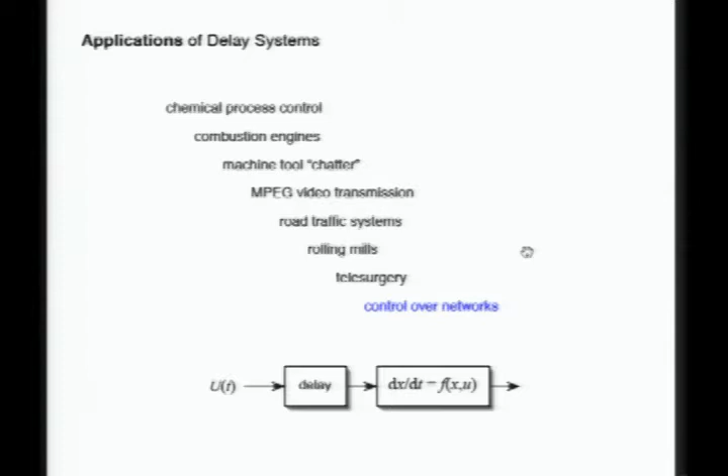Now, a list of engineering applications of delay systems, which is an obligatory part of any such talk, is this particular list that goes into process control, combustion engines, machining, rolling mills, which is an example that Peter Kokotovic contributed to this list, telesurgery, and control over networks that I mentioned.

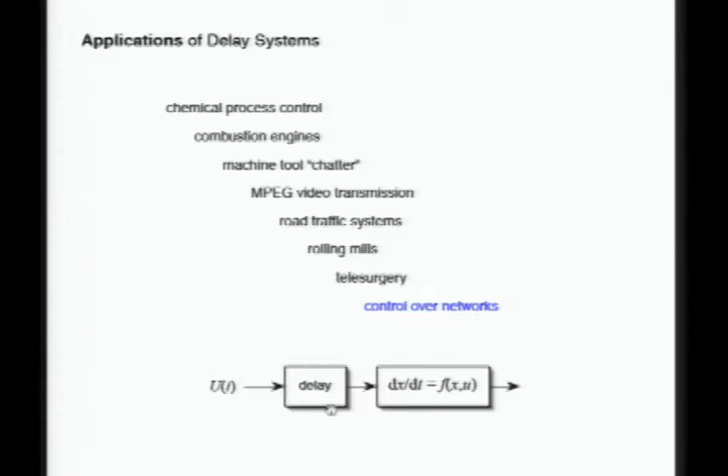My talk will be focused on nonlinear systems with input delays. You can have state delays as well, but the most difficult problem is the one where you have to overcome a delay in the actuator, or where a delay on the sensed variable interferes, which is a similar problem. So I will focus primarily on input delays.

Now, to get to tools for controlling nonlinear systems with long, time-varying, and state-dependent delays, I have to go one step at a time. So I will introduce the ideas that get us to nonlinear control systems with state-dependent delays, basically by going through a progression that I went through over the last few years, namely starting with LTI systems with constant but long, arbitrarily long delays, then extending that to LTI systems with time-varying delays, then going to the nonlinear case with constant delays, and finally wrapping it up with state-dependent delays. The last item will be about 40 to 50% of my talk.

So let me start with LTI systems. Many of you probably know about predictor feedback, but I will remind you and introduce it for others. It's a very neat and elegant tool which, if you haven't seen it, you need to see in the proper way as what it is. So consider this system, x dot equal to Ax plus Bu with a delay on the input. And the idea is that this delay may be very large and the plant may be unstable. How do you compensate that?

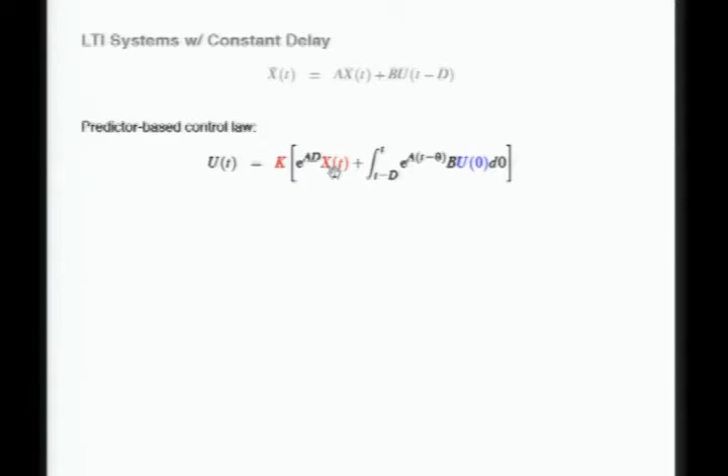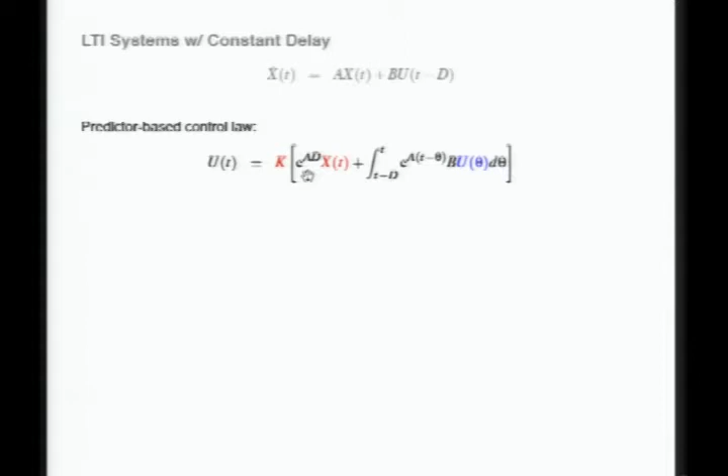If you want some intuition, well, you can look at, for example, the red term. If the plant is unstable, this controller is not going to be just kx, which is not a controller that is aggressive enough for an unstable system. But in the presence of delay, the matrix exponential will increase the gain, and you will get, after the control kicks in, to stabilize that system.

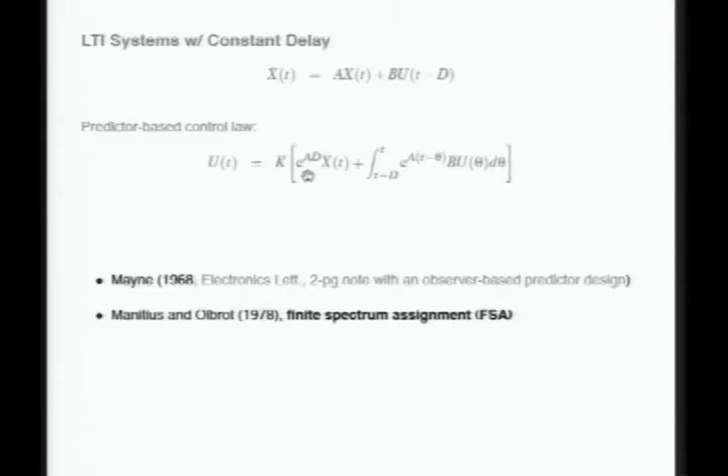Now, where does this idea come from? So there's a history of new, really significant contributions happening in this area every about 10 years. First, Otto Smith introduced the Smith predictor in 1958-59, but this tool is not applicable to unstable systems. It works for systems that are already asymptotically stable and where you just need to compensate a long delay.

Then 10 years later, a result that probably almost nobody knows about except for David Mayne himself, who brought it to my attention. He developed this predictor result 10 years before the people who are credited with it. However, he published it in this Electronics Letters journal. It was a 2-page note, and it even tackles the output feedback case using an observer-based predictor design. Anyway, nobody really knows about that.

This result is generally credited to Manitius and Olbrot in their Transactions paper of 1978, and this approach is referred to as finite spectrum assignment. Why finite spectrum assignment? Because you completely eliminate the effect of the delay after d time units, which means that the spectrum of the system consists of the poles of the ODE that you've placed at arbitrary locations, plus the poles of a transport equation of a pure delay, which is fed with a zero. And those poles are poles at negative infinity. So that's why it's called a finite spectrum assignment. Anyway, for us, I will refer to it as predictor feedback.

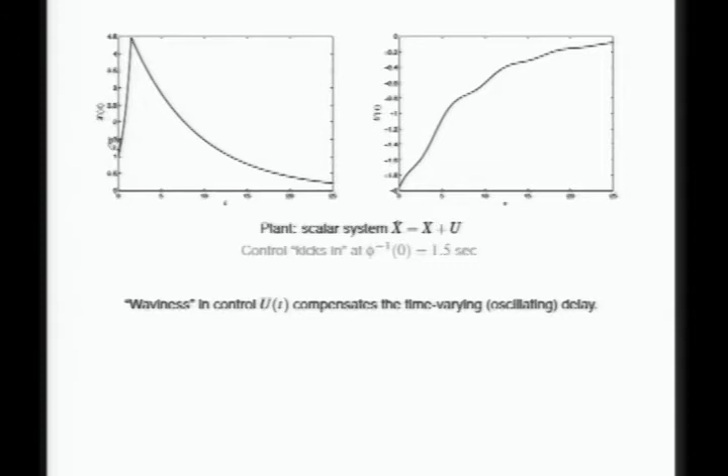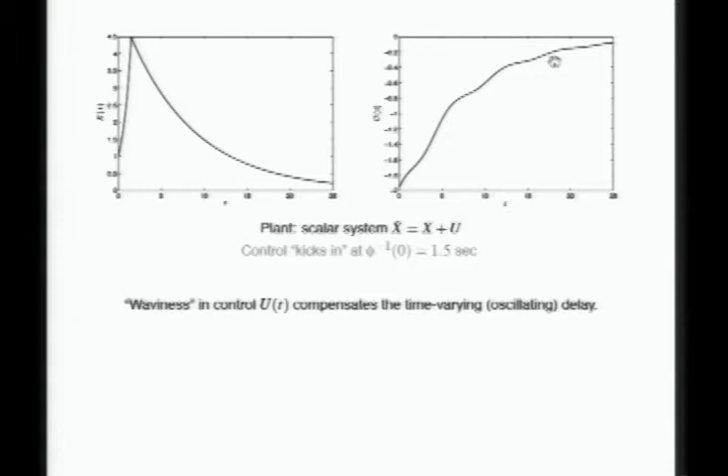Here's an example. The simplest one I can think of, a scalar but unstable system with a time delay that has that sinusoidal pattern. In the response of the state, you don't see any effect of that time, because before the control kicks in, the system runs in open loop. After the control kicks in, the delay is completely neutralized. But in the input, you see how the time-varying delay is being compensated. You see this undulating pattern in the input. This is just an illustrating example.

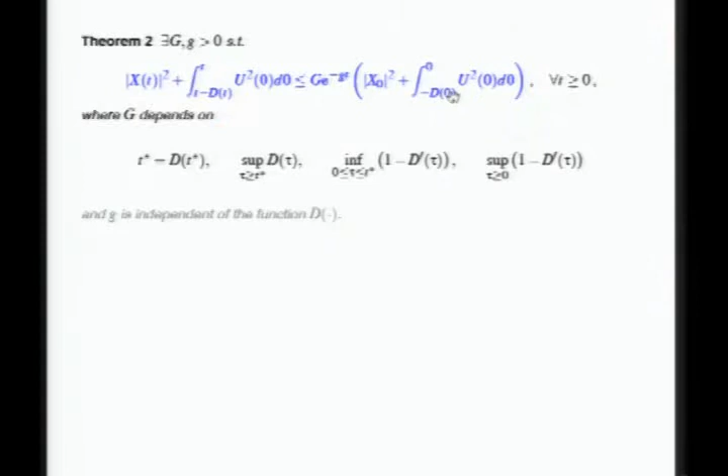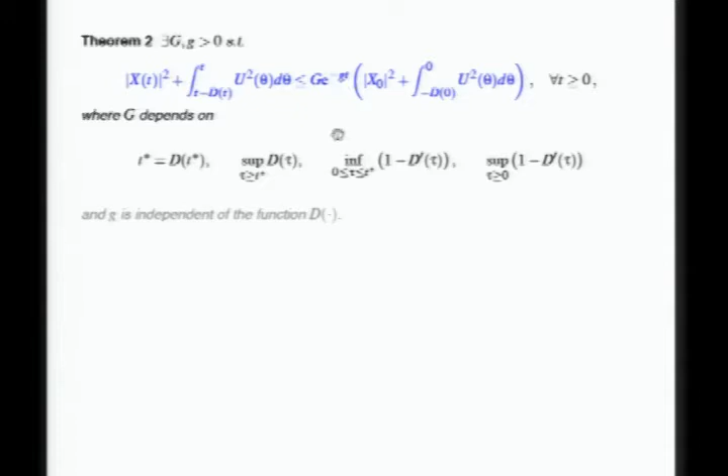What can one prove? One can prove exponential stability in the sense of this L2 norm. So the state consists of a Euclidean norm of the ODE plus an L2 norm of the actuator memory over the time interval equal to the delay. The initial condition is the same norm, but at time t equal to 0. There may be a large overshoot G, which depends actually on the shape of the function d. The lowercase g, the exponential decay rate, is independent of the delay because the delay is actually compensated, so it has no effect on the decay rate.

Now, what are the conditions of a result like this? This is important to see because all the constraints that arise in the time-varying case will also come up in the state-dependent case. There are 4 conditions on the delay, and these are the least restrictive conditions you can get in the setting where you have a time-varying delay. First of all, the delay needs to be non-negative, which means causality. That's an obvious condition. Second, the delay needs to be uniformly bounded, and that simply physically means that all inputs eventually reach the plant.

The fourth condition is that d prime, the delay rate, is bounded from below, which means that the delay cannot just instantaneously disappear. It can disappear only gradually. The key condition, though, the most important of these 4, is that the delay rate is bounded by 1. Why 1? Well, physically, that happens to have the meaning that the input signal never gets reversed. The plant always keeps experiencing newer and newer inputs sent to the plant rather than going back to the older one.

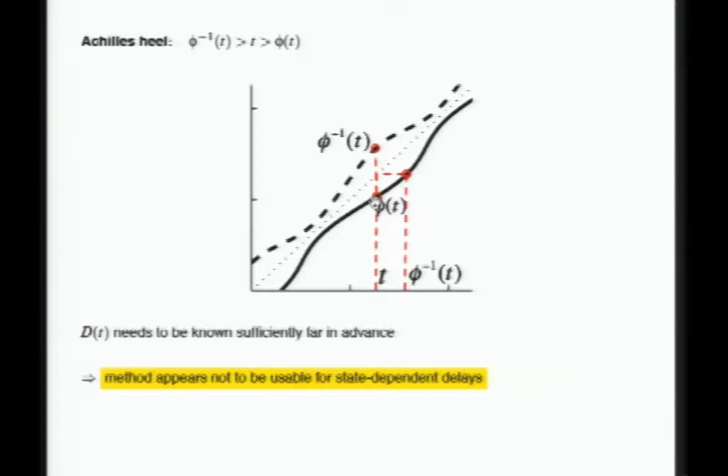The Achilles heel of this whole idea of time-varying delays is the following: the inverse function, phi inverse, which is the inverse of the delay time, happens to be a future value of the function phi. In other words, you need to know the delay a certain length of time in advance in order to be able to invert this function and know the prediction horizon.

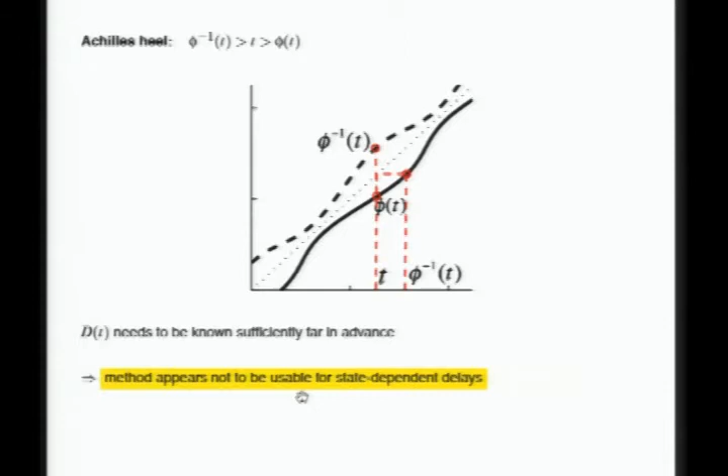So that's a problem. And I thought that there was an insurmountable obstacle for state-dependent delays, because I thought there's no way you could know such a time for a system that is running in real time, and the state depends on the input, which is yet to be computed, and so on and so forth.

Now, let me forget the time-varying delays for a moment and step back to constant delays, but now introduce nonlinear systems. This will be very, very brief, but one big conceptual step comes up. So let me consider systems of the form x dot equal to f of x, u.

I don't know why this dot... It's there. Huh? It is there. You can see it. Okay. Small, but we can see it. That's in Acrobat Reader, but in the preview it shows up nicely.

Anyway, so x dot equal to f of x, u. Completely general nonlinear systems with two reasonable assumptions. Suppose that for the nominal case without the delay, a stabilizing controller is known. Maybe a locally asymptotically or globally asymptotically stabilizing controller. In general, I will assume globally.

And for getting a global result, I also need to assume that the open loop system is forward complete. In other words, it doesn't have a finite escape time. It may be nonlinear, the state may be getting large, but it will not explode before the control gets to kick in. This is a natural assumption. If your system may have a finite escape time and the control is delayed, it's a hopeless scenario. That's all natural, but here's the tricky part.

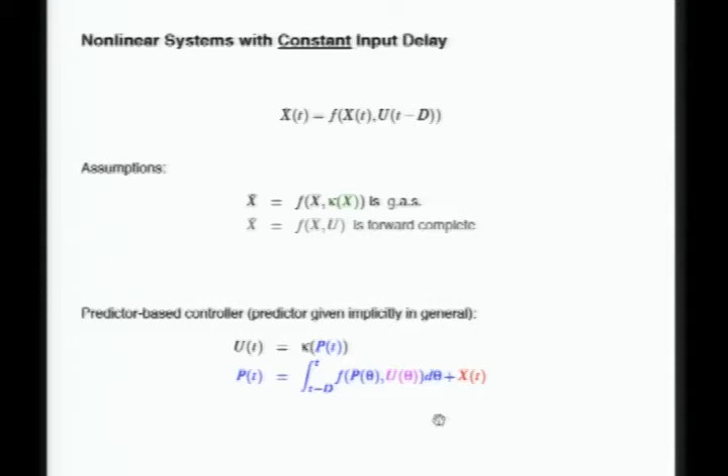Now here, this looks trivial, but actually what's hiding here is different than what it seems. This is not to be viewed as some sort of a filter, as a dynamic component to this feedback law that you calculate. This P is simply a transformation of the current state X. This is not dynamic feedback. It's a purely static feedback where you should think that at each time t, you recompute this variable P using the history of the committed input u and the currently measured state.

The question is how to compute this, and when is it possibly explicitly computable. In general, it is not explicitly computable, but we can prove everything that we need to prove, namely global stabilization under these assumptions for a system in this form.

Now, what is really conceptually the form of this predictor feedback? I will try to make this clear for a particular class of systems where an explicit form for the predictor can be given. This is the class of the so-called strict feed-forward systems. It's a narrower class than strict feedback systems. There aren't too many of those, but they're interesting systems because they're not feedback linearizable, and yet they can be globally stabilized.

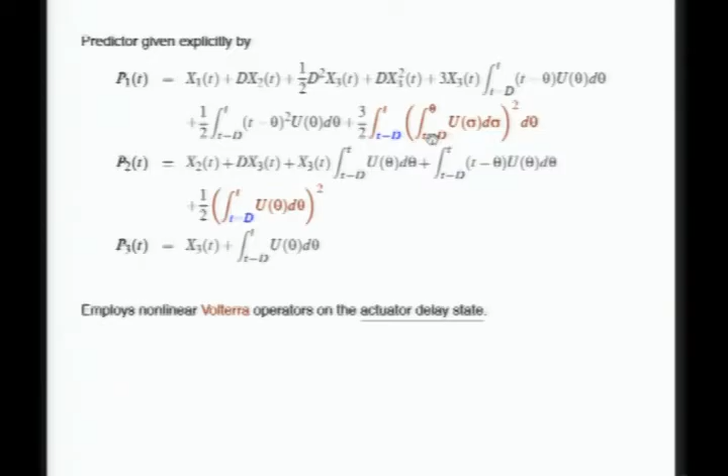So this is truly a full state static feedback, where you have to think of u as a state of the system. This is the actuator state. It's not to be thought of as memory, as a part of a dynamic compensator. So that's typically conceptually what you deal with when you're dealing with nonlinear predictor feedback problems.

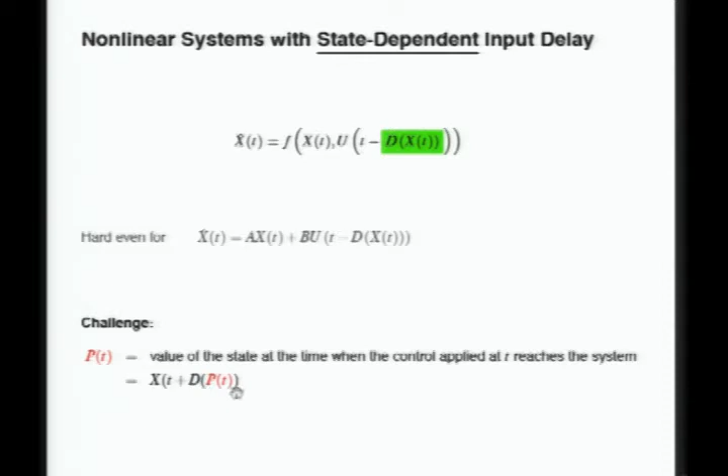The prediction time, the predictor state is the value of the state at the time when the control applied at t reaches the system. But you don't know when this control will reach the system because it depends on the delay time evaluated at that yet to be determined prediction state. It's a chicken and egg problem. It seems impossible to resolve. But it turns out there is a way.

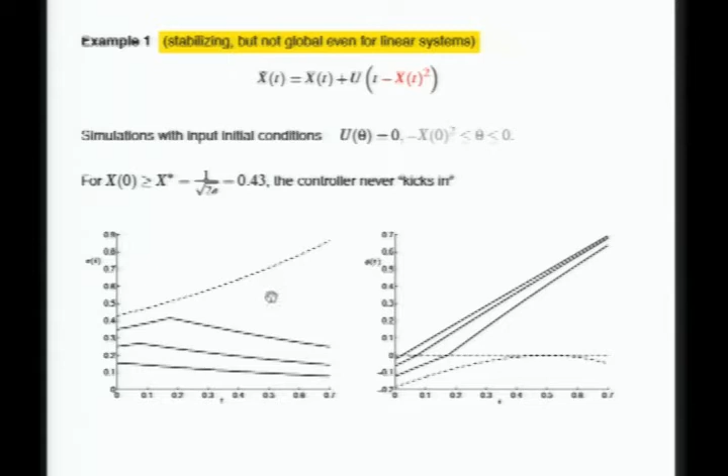But if the initial condition is larger than 0.43, the control will never kick in. This is the function phi, t minus the delay d of t. You see how it eventually gets reversed, and the control never kicks in, and the state goes to infinity. So this illustrates, that's my disclaimer. This is what you cannot ever achieve, but local stabilization you can achieve.

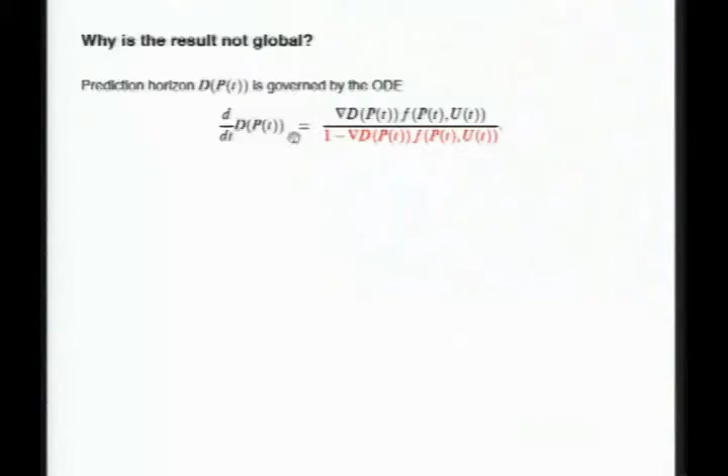Now let me discuss further why this result is not global. If you look at the evolution of the prediction horizon, namely the delay function of the prediction state, it is governed by this ODE. And from the possibility of division by 0, if gradient d times f gets too large, you see that the prediction time might go to infinity, which means that at some future time point, the direction of the input signal will get reversed and the input will never kick in.

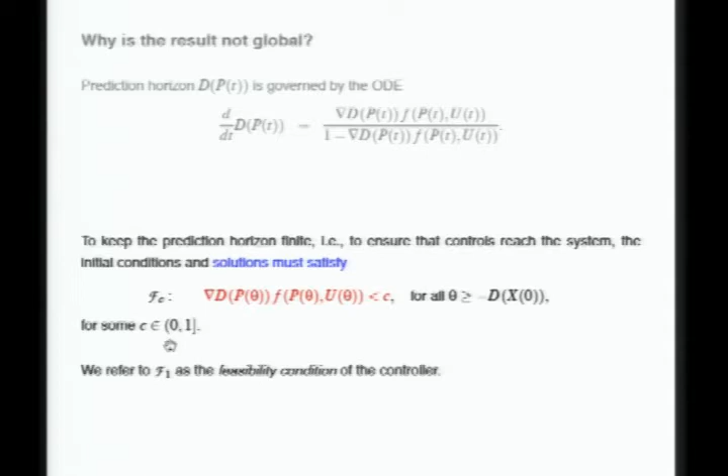So the conclusion there is that in order to study this system and establish at least local stability, the key condition is that the gradient d times f be smaller than 1, or smaller than some conservative bound c, which may be some number between 0 and 1.

What is the meaning of this condition? This is a condition on the solutions of the system. I call it a feasibility condition of the controller. If this condition is violated, the controller becomes infinite and yet doesn't kick in. That's essentially what it is. It's a feasibility on the controller. So it's a local result. So let me show you what the meaning of this local result is.

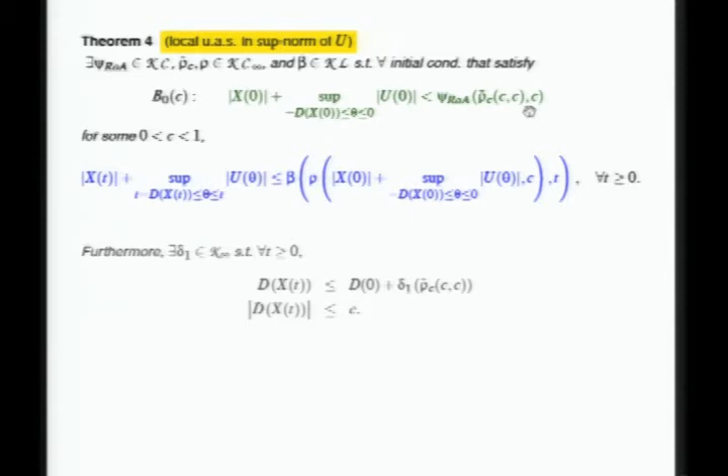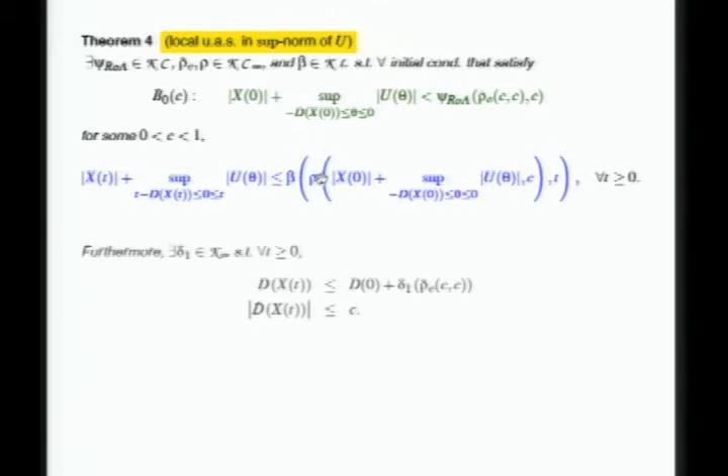The stability result obtained is a local uniform asymptotic stability result in the supremum norm for U. So it's not in L2. It's very hard to get results where the norm of the state is L2, but it can be obtained in the supremum norm. So the meaning of this result is that if the initial condition is in a ball of some radius, and I can control the size of that ball by controlling how conservative I take this C relative to the true boundary of the feasibility region. So if the initial condition is in this ball B0, then a stability estimate in class KL is available.

The assumptions, I've already stated them: forward completeness and global uniform asymptotic stability of the nominal system. But it's important to say what the assumption of the function D is. It's a very, very weak assumption. D is simply a non-negative continuously differentiable function of the state. So there's nothing restrictive being imposed on D.

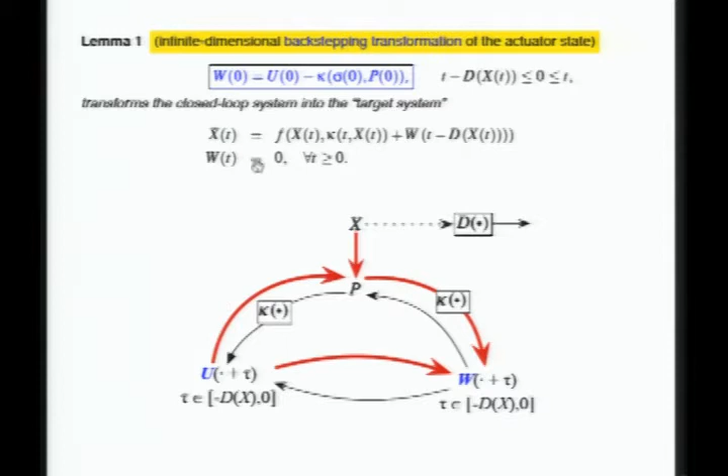The steps are the following. Some of them are really important, and many of the other ones I'm skipping. There is this key transformation, the infinite dimensional backstepping transformation. It's a transformation that shifts the true actuator state into a new transformed actuator state through the predictor state, which is a vector. And that transformation is the key, because after that transformation, the closed loop system has a very convenient form where it consists of a disturbance that goes away in finite time, perturbing a system that is globally uniformly asymptotically stable.

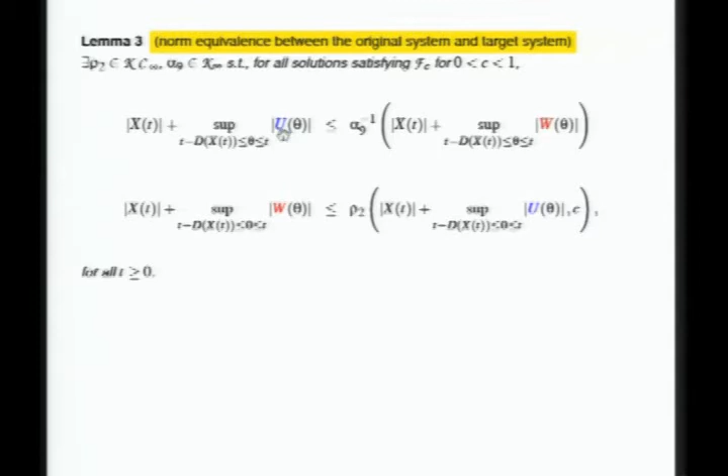For that system, we can prove asymptotic stability in the standard KL setting. In other words, we can find an upper bounding function that decays in time as time goes to infinity to 0, and is a class K function of the initial condition that overbounds in the same norm, the norm on the state. Now, that's not enough because our actuator state is not W, but it's U. So we need to establish norm equivalence between the norms on the target state, W, and the norm on the original state, U. And that norm equivalence can be established using these class K functions for upper bounding and lower bounding the U state in terms of the W state.

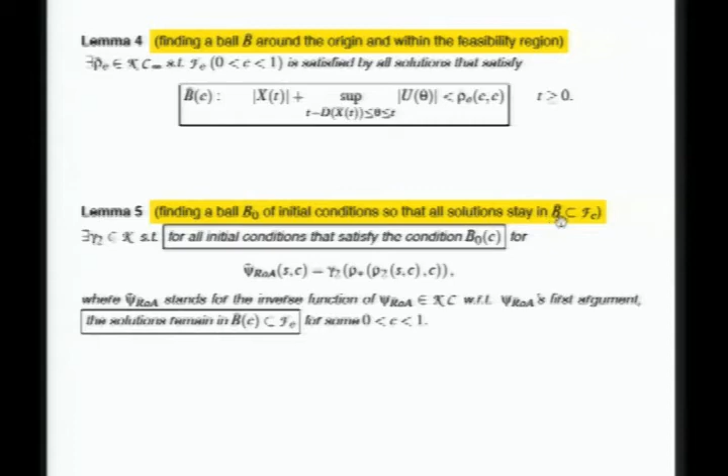Let me skip this. Finally, to complete the proof, I need to show that given the ball B bar, which I construct to be inside the set FC, I can find a ball B naught of initial conditions such that the solutions never exceed B bar and never exceed FC. And this is done by doing estimates on the solutions of the predictor integral equation and so on. So that's the gist of the analysis of this problem. I will move forward now. So I have a few examples. Yes?

I have a question. So, you showed this D prime condition is important. Yes. Because you have a particular form of controller, the predictor-based controller, could you modify that form somehow, or is it intrinsic to any feedback controller? Let's say in the linear case. Well, I wouldn't know. I don't know any other way to approach even a linear problem with a state-dependent delay. This is the one I know at this point. So I don't know if this idea of treating the time like that could be applied in the setting of another delay control strategy other than predictor.

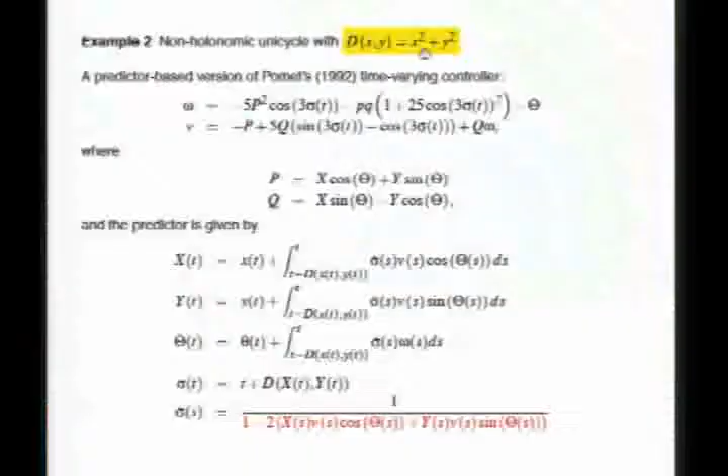So I have 3 examples to show you. The first one is maybe the most complicated. I'm going back to the unicycle. So I'm now introducing a state-dependent delay on the unicycle with the goal of stabilizing the unicycle to the origin. And one could imagine that the controller to the unicycle is at the origin, and the delay depends on the distance of the unicycle from the origin to which this controller wants to attract the unicycle. This is really contrived to be non-trivial, and it's not completely without a physical motivation. So the delay grows with the distance from the target position.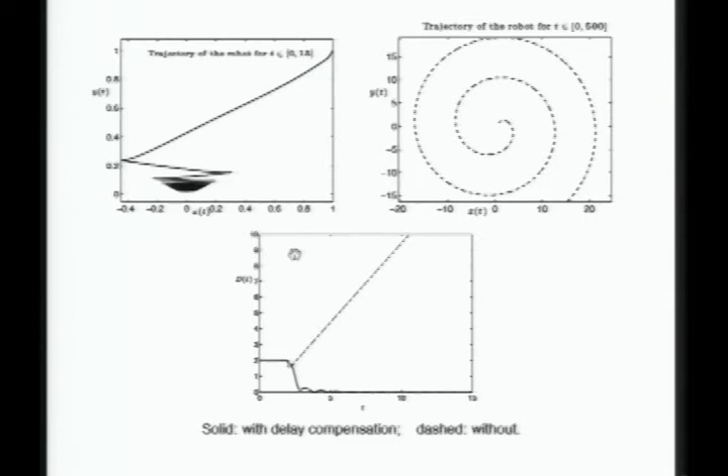Whereas with predictor feedback, you achieve the nominal behavior. The nominal behavior would be to perform this parking maneuver, and I'm sorry that it gets zigzaggy. That's the nature of this problem. If you want to do stabilization, you cannot do exponential stabilization for these classes of systems with smooth feedback. In the uncompensated case, the delay just grows linearly. In the compensated case, as the state goes to 0, the delay itself eventually reaches 0 because it depends on the distance from the desired equilibrium.

Second example. I want to say that global stabilization is not always unachievable. There are some conservative situations where global stabilization might very well be achieved. And they do not correspond to making a condition that the delay is uniformly bounded. It's actually the condition that the delay rate is bounded by 1 that needs to be satisfied.

And that's a tricky condition because the delay rate depends not only on the state x, but also on the input u, which is inside of f. So it's a really, really unlikely to be randomly satisfied condition. But here's one example that illustrates it. So this is a system which is not linear. It's linear in x, but it's nonlinear in u. And this is a convenient normalization of the right-hand side to make everything work globally.

The delay here is a monotonically increasing function. You can almost think of this delay as the Lyapunov function for the system. It's a monotonically increasing function, but it does not grow linearly. It grows kind of slower than linear, logarithmically. This was all constructed so that everything works out globally.

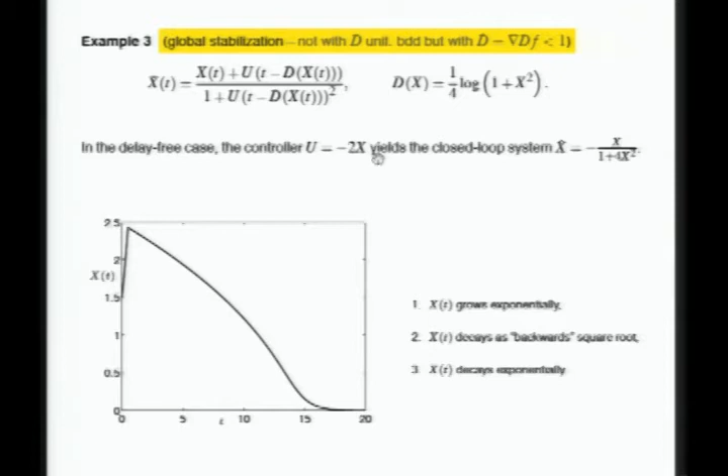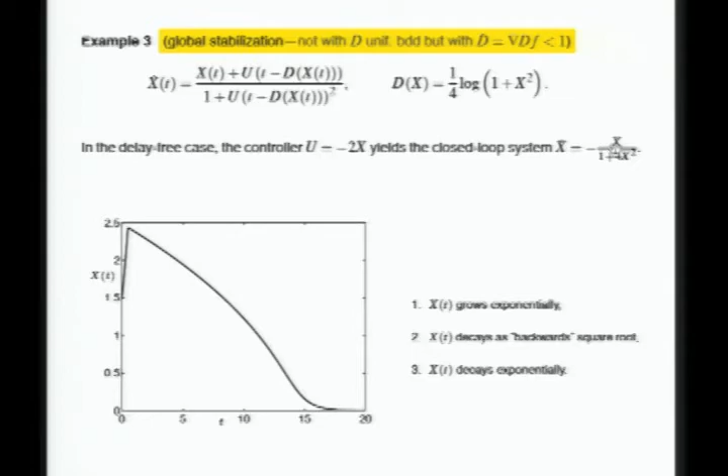The transient is quite illustrative. In open loop, the state grows exponentially. Then the control kicks in. And the nominal system evolves according to this equation, which happens to have a solution that is a backward square root. You see here, it gets steeper and steeper, but when you get near the origin, the linearization takes over and the convergence near the origin is exponential.

So this is my last, I believe, last example. So I should say that since the results achieved are local, assuming forward completeness and assuming global stabilization is an overkill. If the result that I guarantee in the end is pretty conservative, then the conditions should be made less conservative. And it turns out, indeed, that's possible. And this is not a linear-like result at all. In this example, I take a system that is not exponentially stabilizable even locally, and that is not globally stabilizable either.

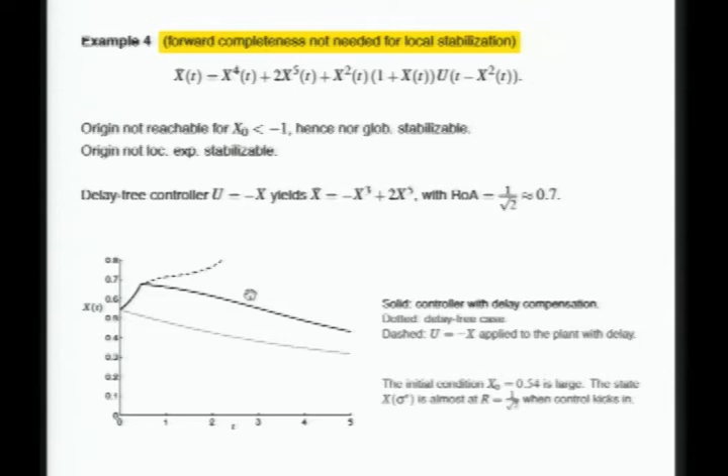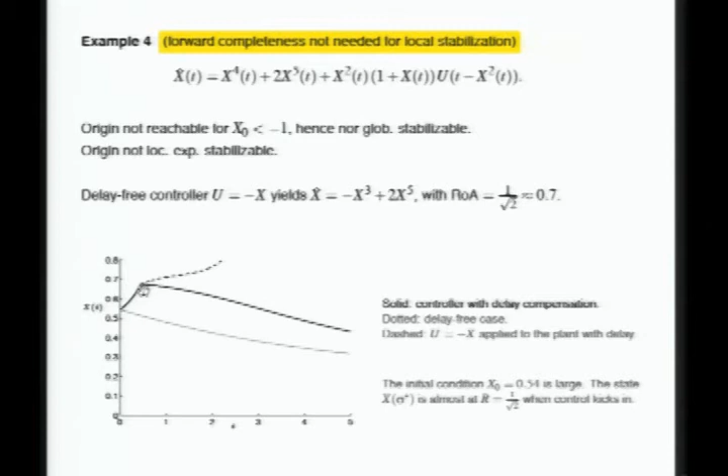So for this result, this solid curve is the trajectory of the system. The dashed curve is the trajectory in the absence of compensation, and the dotted one is the trajectory in the absence of delay completely. So you see here that the control actually kicks in, and then this non-exponential convergence occurs. The region of attraction in the absence of delay for this system is 1 over square root of 2, namely around 0.7. So you see that this initial condition here is actually a very large initial condition. The control kicks in barely when the system escapes the region of attraction.

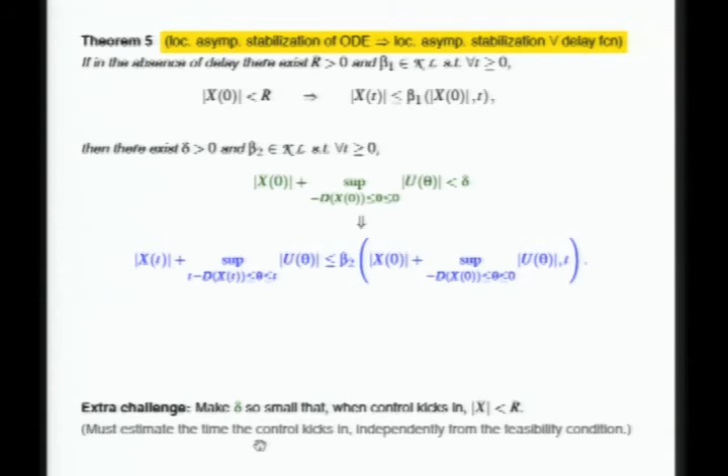I'm mentioning this in order to more clearly understand the issue in the general result. So that needs to be accounted for, the fact that control needs to not only kick in eventually, but it needs to kick in while the state is still within the region of attraction of the non-delayed situation. So a local stability result is established, namely, if a region of attraction exists for the nominal case, then predictor feedback will be locally asymptotically stabilizing with some other smaller region of attraction delta, smaller than R. And to prove this, there is this extra challenge that we must estimate the time that the control kicks in, which depends on the open loop solutions.

To wrap it all up with a thought on other possible things to do, state-dependent delays on the state rather than on the input are as frequent in applications. In fact, there are really many such situations, and we're working on that. And problems with true asynchrony, with sampling and with perturbations in the sampling schedule for sample and hold implementations of predictor feedbacks are important, and I'm working on that with Iasson Karafyllis also. The ultimate robustness, namely achieving input to state stability, a very, very strong form of robustness with respect to delay perturbations, I don't believe is possible. But this is what everybody has, I think, on their mind when they see these results.

Can you make this delay not dependent on the state, but a function of time that is uncertain, possibly even stochastic if you can do it? I don't believe that arbitrarily large uncertainties to arbitrarily large delays will be tractable, but delay disturbances that are occasionally quite large, but satisfy some smallness in the mean or some other type of long-term smallness, I believe should be tractable, and I intend to look into that.